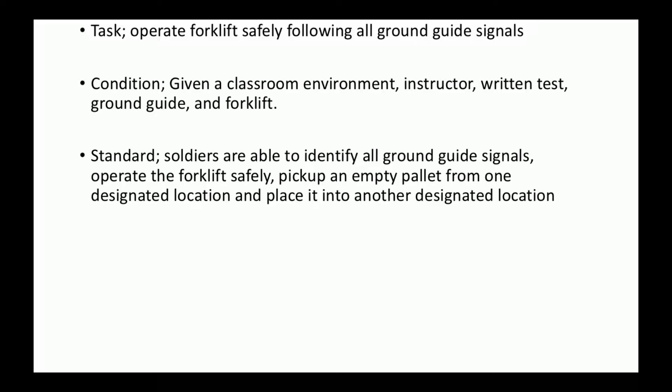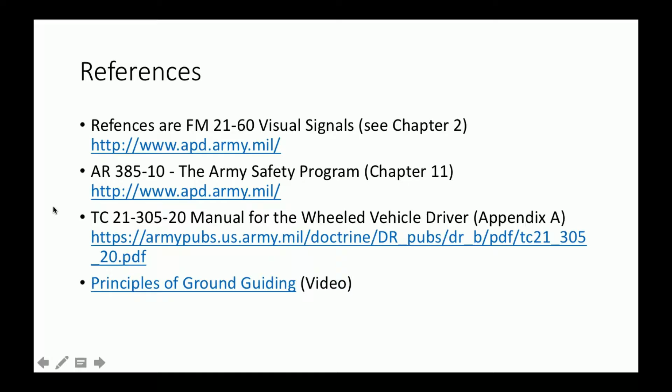Okay, so references. The two main references here are going to be FM 21-60 and AR 385-10. What we're trying to avoid is accidents, crashes, fatalities. I will link this video in the description below, as I don't want to incorporate it into this video.

Alright, some common forklifts that you are likely to run across: the Atlas and Atlas II 10K forklifts. The first and most important distinction to make here is that almost uniformly anything in the Army is going to be rated in 1,000 pounds that it can pick up. So an Atlas 10K forklift will do 10,000 pounds. With the Doosan, because it is a Korean-built forklift, it's also 10K, but it's 10,000 kilos, so the Doosan will pick up something like 22,000 pounds, maybe a little bit more. Just so you're aware, everywhere else the K is indicative of pounds, but with the Doosan it's going to be kilos.

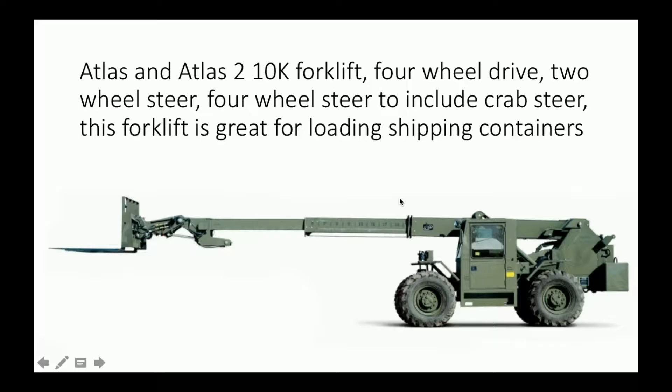Anyway, this forklift has a couple of choices. You have four-wheel drive, you also have two-wheel steer, four-wheel steer to include crab steer, and I've got some pictures to describe that here in a minute. This forklift is great for loading shipping containers, as this boom obviously extends and retracts. Front wheel drive, like every car you have ever owned or driven, the front wheels turn.

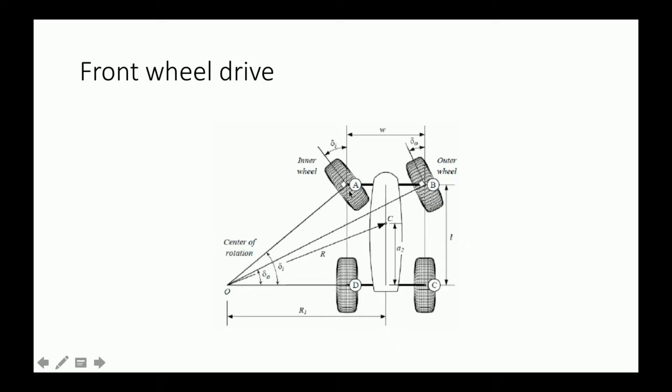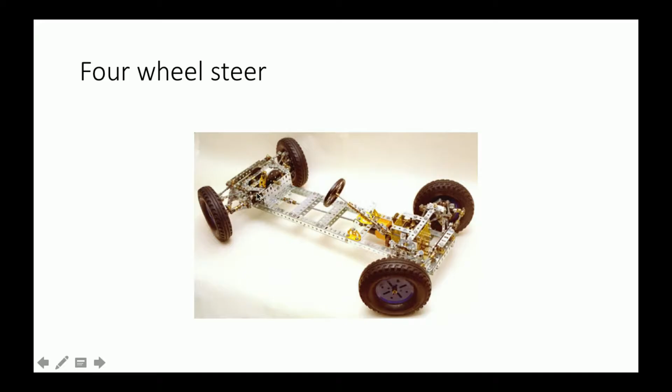Four-wheel steer, where the front wheels would turn one direction, the rear wheels would turn in the opposing direction. This facilitates a much tighter turning radius. Crab steer is super helpful when you're trying to creep up into a very specific location and you can't turn into it. Basically, if you turn the wheels this way, then the whole truck will move in this direction, but the plane that it's on will stay the same.

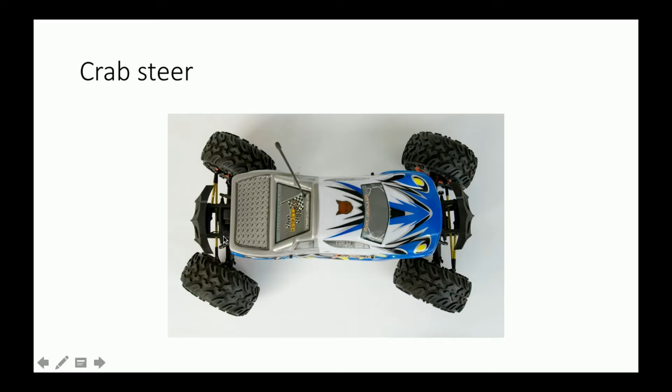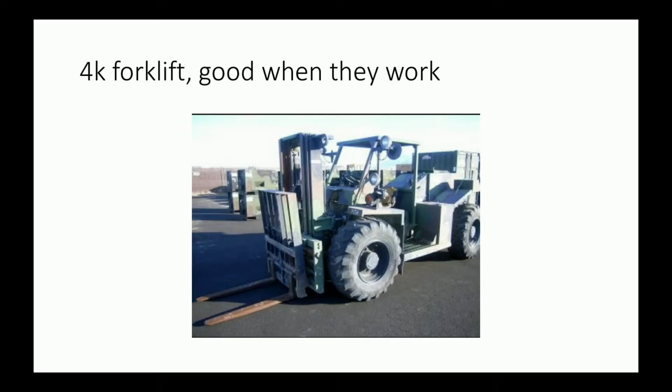Okay, the 4K forklift. The forklift is good when they work. These are not the best forklifts the Army ever bought. I'm just going to leave it at that.

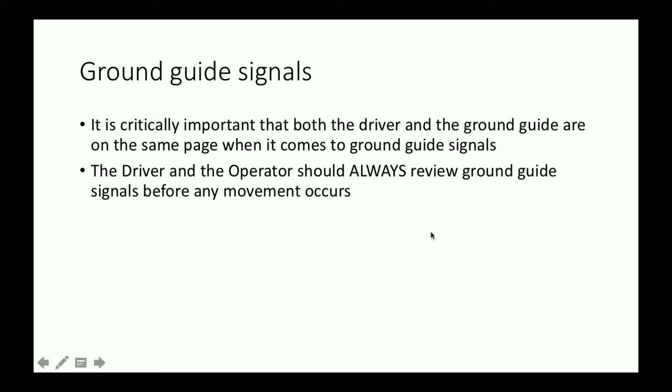Ground guide signals. It is critically important that both the driver and the ground guide are on the same page when it comes to ground guide signals. The driver and operator should always review ground guide signals before any movement occurs. This is just to make sure you guys are on the same page and you both understand what ground guide signals mean. Okay, in the effort of time, we're going to do just a very brief overview of what the hand and arm signals are.

I'm not going to read the description for you. You can pause the video, read them if necessary. It's critically important that you understand how to state that you don't understand. I know it's kind of a weird way of saying it, but just know you have to know this one. Starting the engine, every single soldier should know how to do that one.

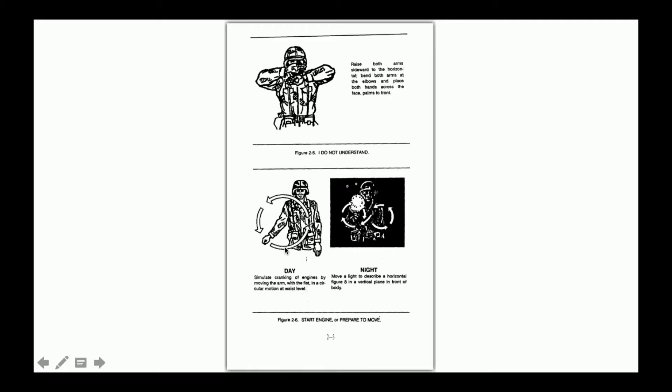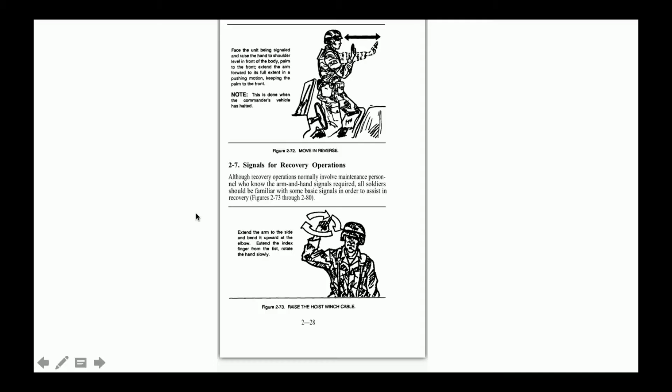Moving in reverse, when you do this, you will need two ground guides. So when it comes to raising the hoist, obviously there's not a hoist on a forklift. However, this is going to be indicative of raising and lowering your forks. So this would be the lowering of your forks. When it comes to boom, the boom going up and down isn't really up and down. What you're doing is moving the boom away from the truck driver or towards the truck driver.

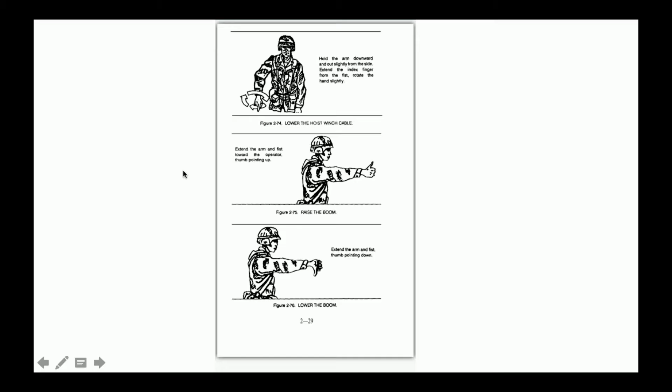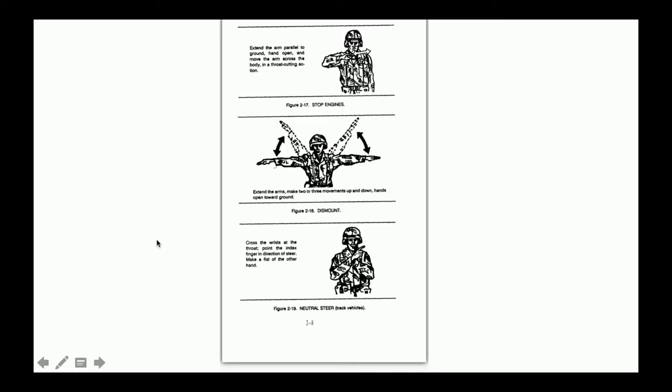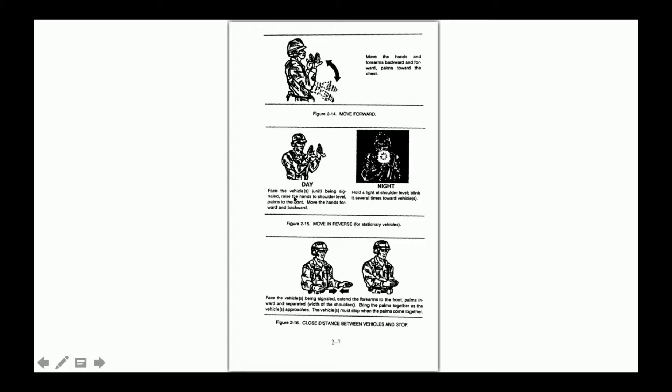We're not worried about dismounts. Everyone should know how to stop the engine. Neutral steer, that is a track only thing, don't worry about that. To move forward, you will definitely need to know this one. Moving in reverse, again, same one as we showed earlier. Alright, to turn, yeah, left and right is obviously the other hand pointing the other direction.

Now, as far as forks goes, moving the forks left or right, in other words, increasing or decreasing the distance between the forks, or you're just moving one fork a little bit over to the left or a little bit over to the right to allow you to fit in where you need to go, you're going to point at that fork and the direction in which it needs to move.

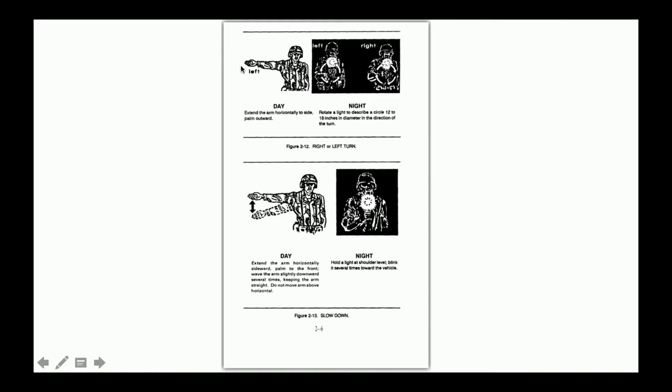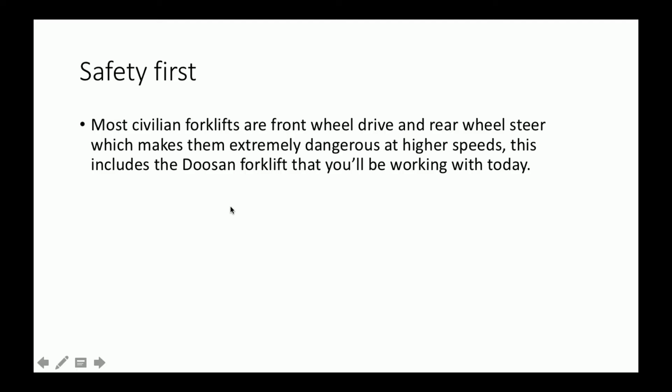Alright, safety first. Most civilian forklifts are front-wheel drive and rear-wheel steer, which makes them extremely dangerous at higher speeds. This includes the Doosan forklift that you'll be working with today. Essentially what this means is that at higher speeds, when turning a rear-wheel steer vehicle, the front tires will always want to bite into the asphalt and stop, while the rear of the vehicle simultaneously wants to beat the front of the truck to the front.

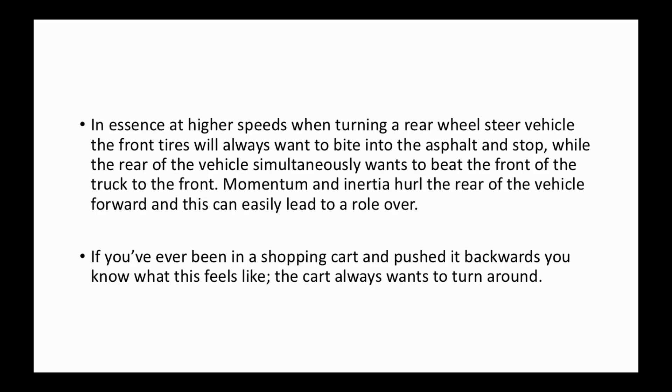Momentum and inertia hurl the rear of the vehicle forward, and this can easily lead to a rollover. If you've ever been in a shopping cart and pushed it backwards, you know what this feels like. The cart always wants to turn around. I will also link this video in the description below.

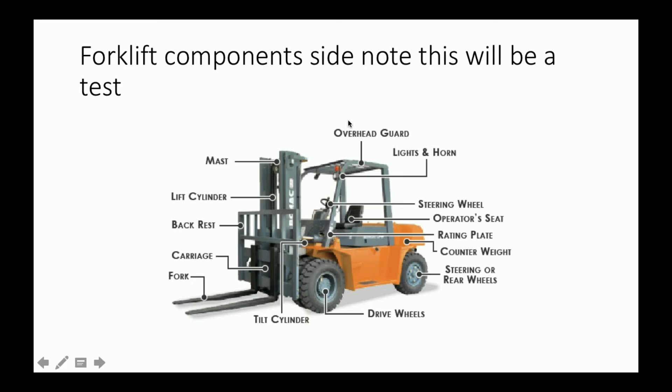Forklift components. Side note, this will be on the test. So if you're watching this on YouTube, I am probably gone and hopefully they're still using this test. But you're going to have to memorize the components listed here. Internal controls.

Okay, as far as hydraulic controls go, there are 5 primary controls. You have your first lever, which is going to raise or lower your forks. Just like an aircraft, if you press back, the forks will rise. If you press forward, the forks will lower. Then you have mast tilt.

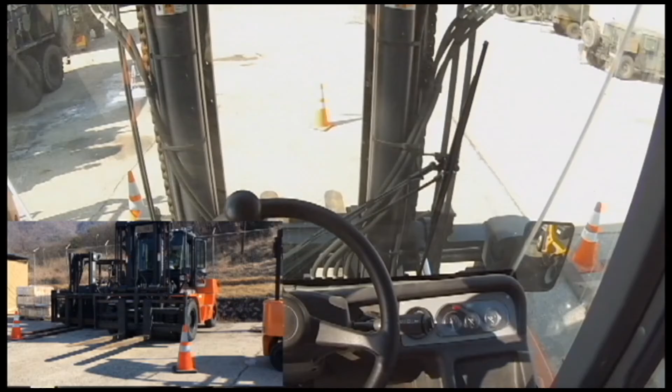This is going to take the mast and tip it back towards us. Or if I press forward, it's going to tip the mast back down. Next we have our forks left and right lateral control. Now this is going to move the whole assembly left and right. It doesn't move the forks independently, so the distance between the forks will not change as you adjust this lever.

Next we have the 2 individual forks. So left fork, this is going to go in. If I press forward, the left fork will go out. Finally, the far right one, if I press this right lever in, the fork will come in. If I press out, the fork will go out.